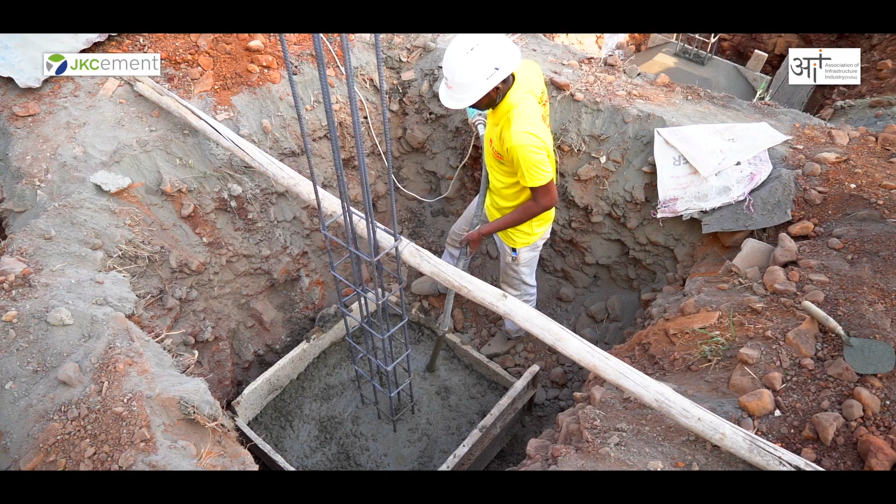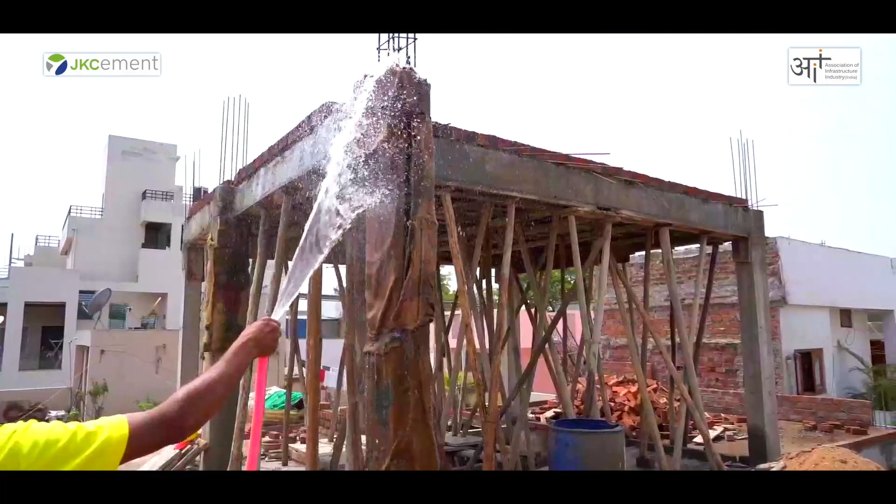For any individual, the major investment, the single major investment that a person makes in his entire lifetime is building a house.

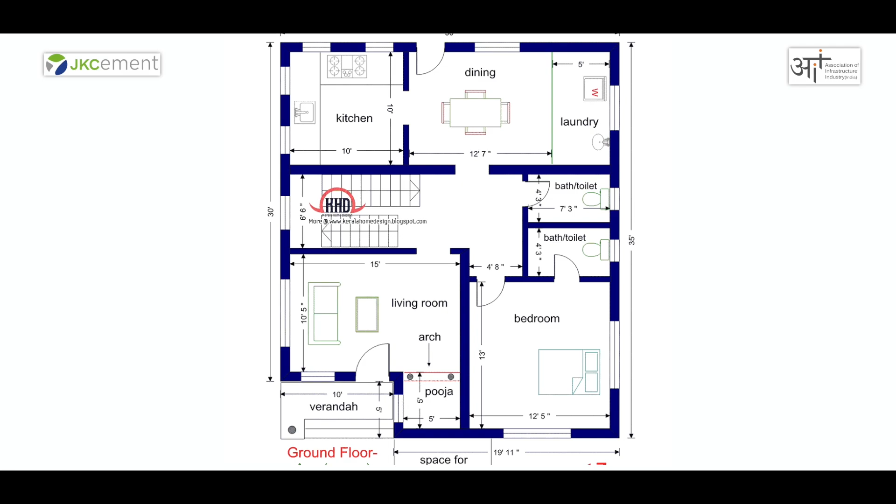And how do you want your house to be like? You and your family members. So all of you have to sit together, you have to decide. When you have these discussions, then you can actually prepare a brief. You yourself may not really know how to have these things done.

Therefore, you need the advice of an architect. Maybe an experienced professional architect would actually tell you, look, this is fine, but I can suggest something much better than this. You think something in your mind, but when you start conversing, when you start discussing, then things will fall in place.

And then over a series of discussions, things will become more clear. When you are appointing the architect, what are the things that the architect is going to deliver, and what is the fees that you are going to pay him, at what stages you are going to make the payments. If these are discussed well in advance and agreed, then there should not be any problem.

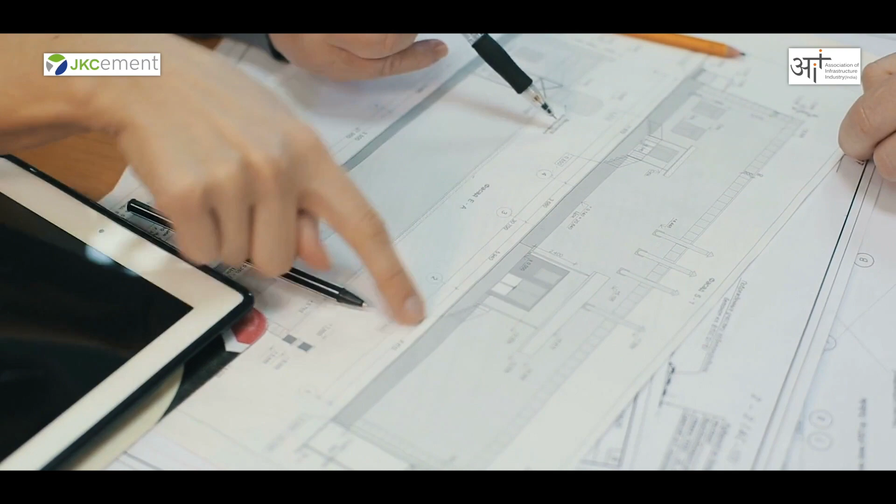The architect and the family members, all of them need to have a couple of meetings, and the architect has to understand, and all the family members should also be able to express themselves. So this is the first step. Right on day one, you should say that this is my budget, and then the architect will ensure that everything falls within that budget. So specifications are important.

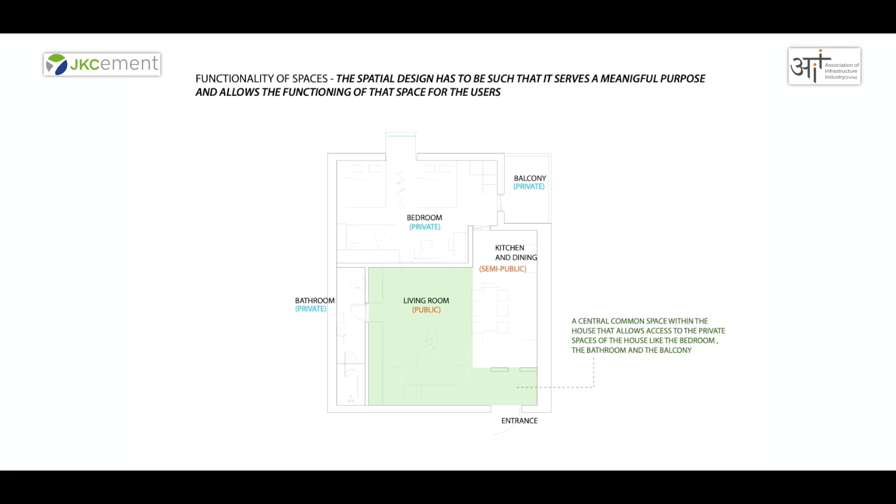Space is also very important. You have to make certain compromises, either in terms of space or in terms of specifications. So you can say, okay, I will sacrifice Italian marble, maybe I'll go for a cheaper flooring material. I can save some money there, but then I want the space. I don't want to reduce the size.

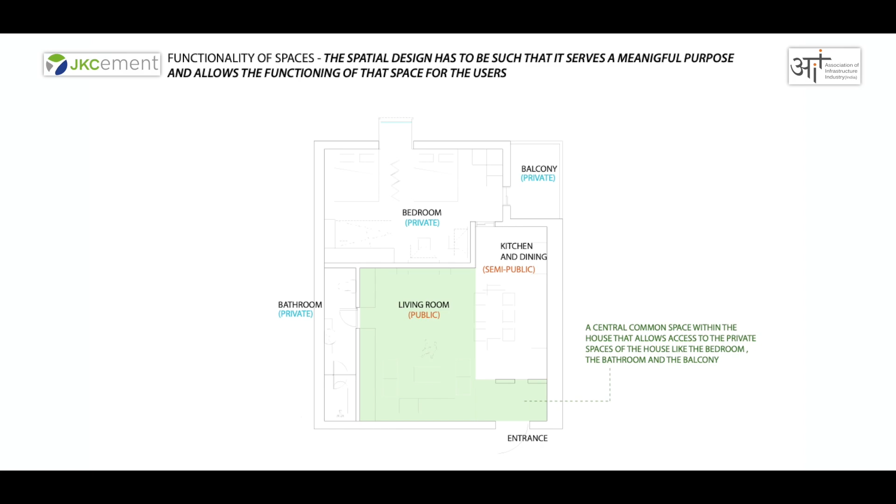Or I want to cut down on something else, or I will do something else at a later date when I get the additional funds. But then later on I can't get more space in my room. So therefore I'd rather first go in for a larger room and then spend on the other things at a later date.

But then of course there are externalities, like you don't know when the budget is going to come, when the price of cement or steel is going to increase. There are these things, because you plan for a project for a particular duration. But if for some reason it goes on to 2 years, 3 years, then the next year's budget, excise duty and customs and several things will change, obviously. So with those things changing, the prices of cement and steel can increase.

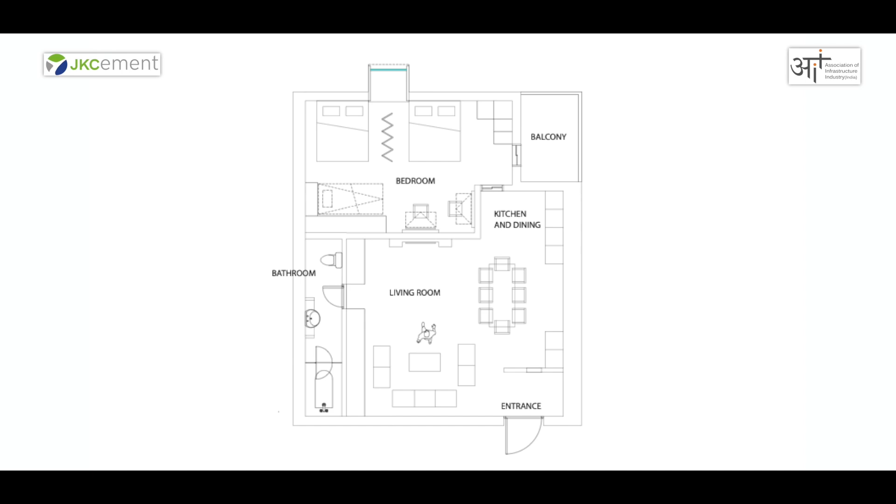Contingencies in every project, you have to plan for contingencies. You have to plan for some overheads. You have to plan for the unforeseen also. If you have 50 lakhs in your bank, don't tell the architect that I want a house in 50 lakhs, because there is always an unforeseen element. Prices may increase.

It's beyond the hands of many of us. So therefore, tell him my budget is around 40 or maybe 45, because there is always that something extra for which you need to keep some amount of money in the bank.

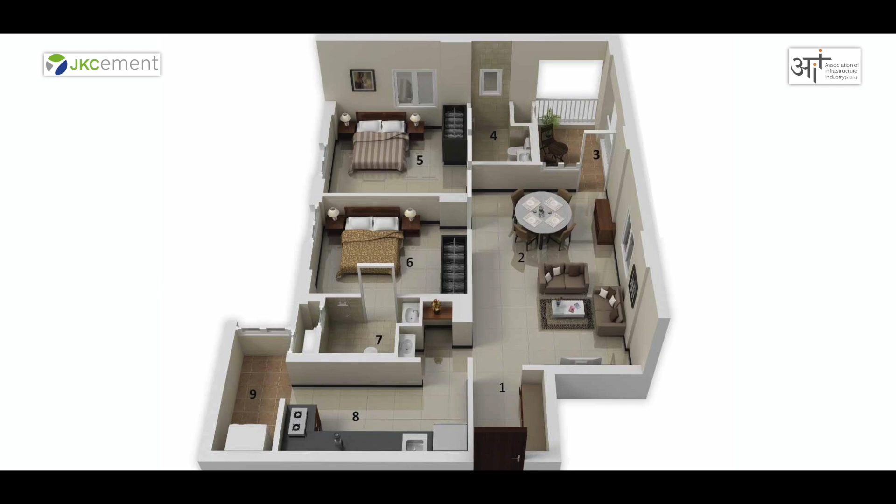Step 2 will be the architect will develop a concept, and in that concept maybe he can do a walkthrough, maybe he'll prepare a first concept plan, an elevation. Sections are not required at this stage, but just a plan and an elevation and maybe a 3D view, so that the family is able to understand and then say that yes, this is something.

Once that is done, then you move to the third step, wherein you look at the specifications and other things, because without that you can't really come down to the budget. If you're putting Italian marble or if you're putting Kadapa stone, there could be a huge variation in the budget.

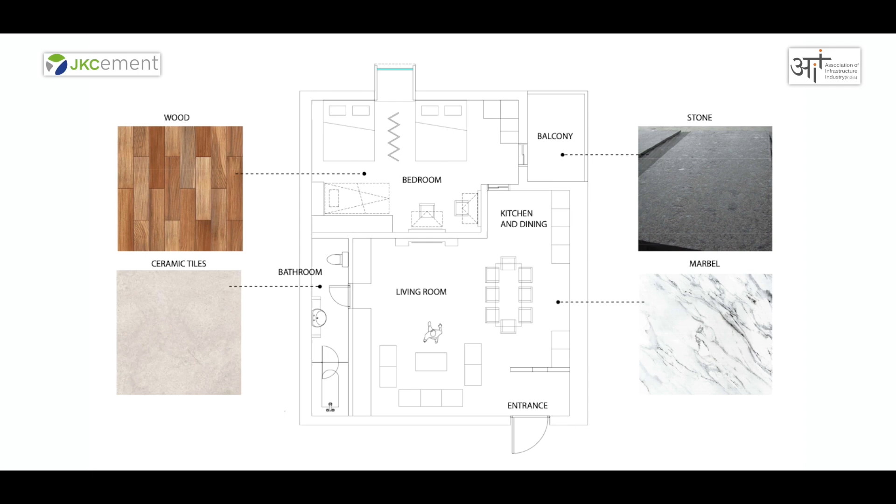So once those are done, then you move to step 4, where you go for the approvals. The drawings have to be put up to the municipal corporation or to the local body, whoever is the concerned agency, and you have to get an approval for the permission to construct.

So once that is done, then you can't make changes. Therefore, before you reach that stage, it is important that things are finalized, and once that is done, then you need to appoint a contractor.

There could be different kinds of contracts. You could give a turnkey contract to the architect itself. Then the next process is, of course, looking for an auspicious date.

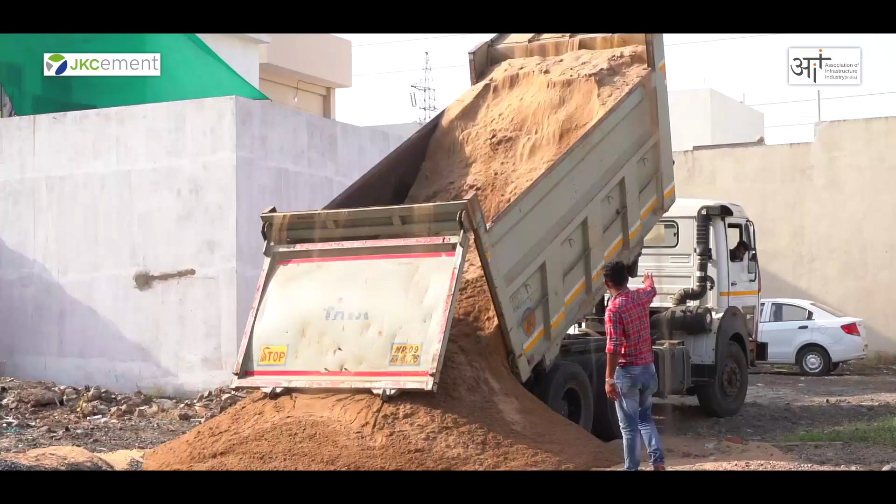You have to do the Bhumi Puja, materials have to come in, construction has to start, commencement certificate has to be taken and start the work, and then supervision is extremely important, because there can be so many things on the drawings, on the specifications, in your contract, but once something is put, then you can't again start breaking it.

So therefore, extremely important is supervision, ensure quality of the work is done, and while doing the construction, invariably there will be some small minor tweaking that happens. Small changes are always possible. Major structural changes may not be possible, but small changes, please do it.

And then while doing it, don't forget to put the cables inside the concrete or whatever, because quite often things are forgotten. So it's very important that all these nitty-gritties are taken into account, and once all this is done, then the final finishings and fittings, there again there is a lot of leeway.

What kind of electrical fittings that you want, you don't have to decide right on the first day. So the choice of the chandelier or whatever, that can happen much later, but you know that yes, I need to have a chandelier in my drawing room, so you need to provide that hook, that electrical point connection and all that stuff, otherwise you can't do it at a later date.

So once you do all this, then again you need to go to the local body for getting a completion certificate. It is only then completion certificate, occupancy certificate, only then you can get in. Before that you need to get the temporary water connection, then the permanent water connection, the permanent electricity connection. So there is a lot of paperwork that also has to be done.